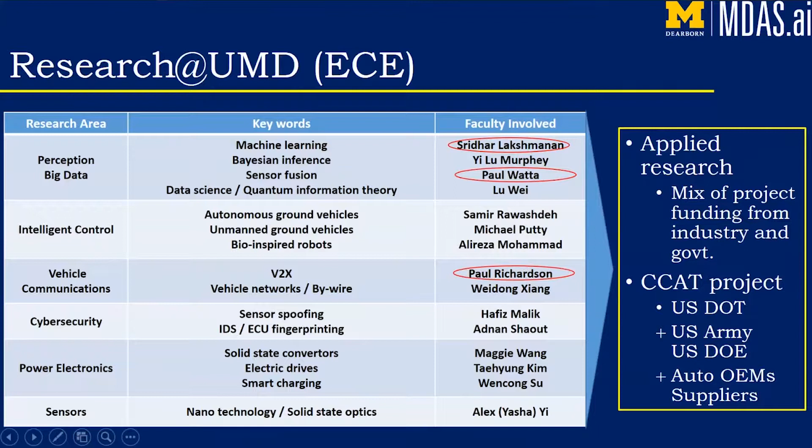I'm going to start this discussion on fuel-efficient platooning by showing a video. This is a video that was recorded late fall of 2018. I will pause this to make points, and then I will run this completely.

They all try to draft off each other by maintaining a closer than normal following distance. Following distance can be as close as 20 feet, as much as 300 feet, depending on different situations, and we'll get into it. In this particular case, around 100 feet when they're following each other.

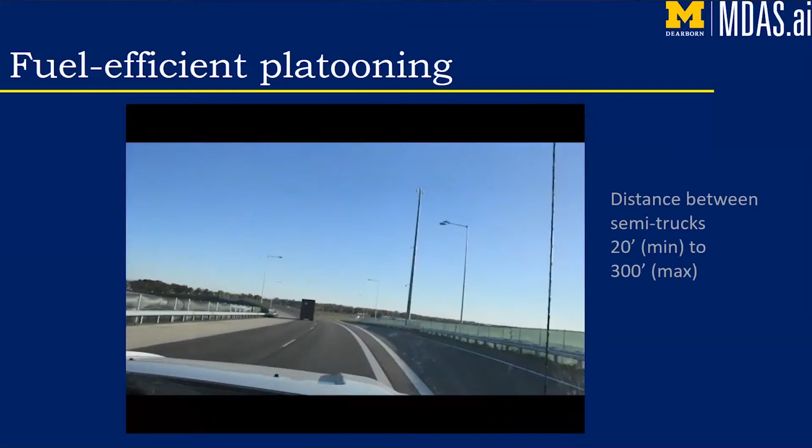This is a view of that platoon convoy from another vehicle, the vehicle from which this video is shot. It will make some maneuvers as it relates to this platoon, and the platoon will react to it, and you will see in a few minutes.

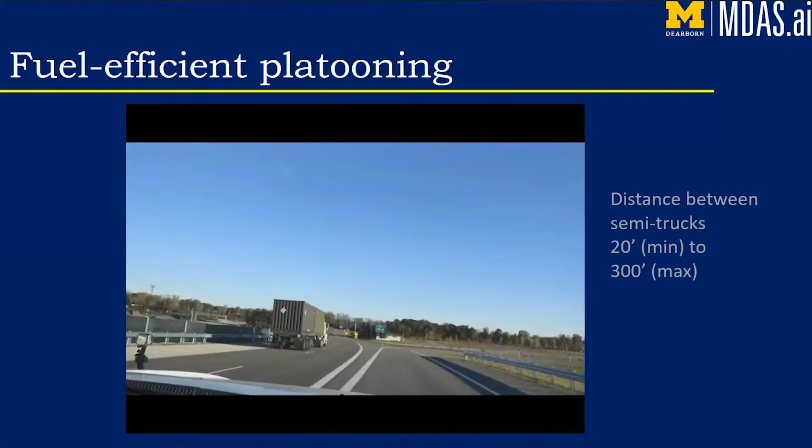This is a highway exit at American Center for Mobility, and we'll come around. What you saw there was that vehicle from which that video was shot trying to cut in between the platoon, between the lead vehicle and the second vehicle.

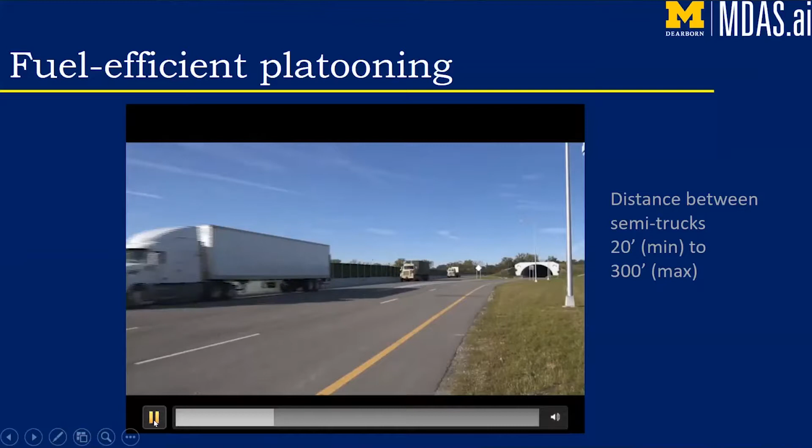When that happens, the follower vehicle increases the gap distance that this vehicle can safely operate within the platoon. When this vehicle leaves the platoon, it automatically closes the gap distance. You can see that when the other vehicle cut in, it increased gap distance with it as it would with the normal. Of course, those can be programmed in terms of what they are.

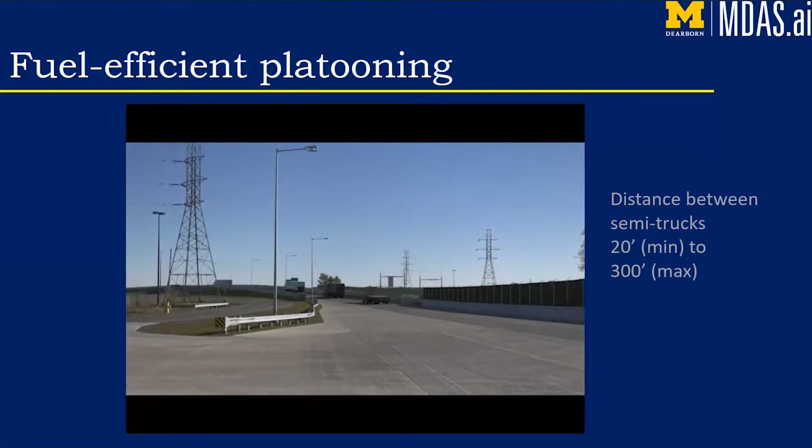As this video progresses, you will see various features in the road environment. You will see curvature, a little bit of vertical grade, some bridges, overpasses, etc. I will make a reference to them in the future. Every one of those presents a challenge from a radio network standpoint and from the standpoint of achieving this platooning feature.

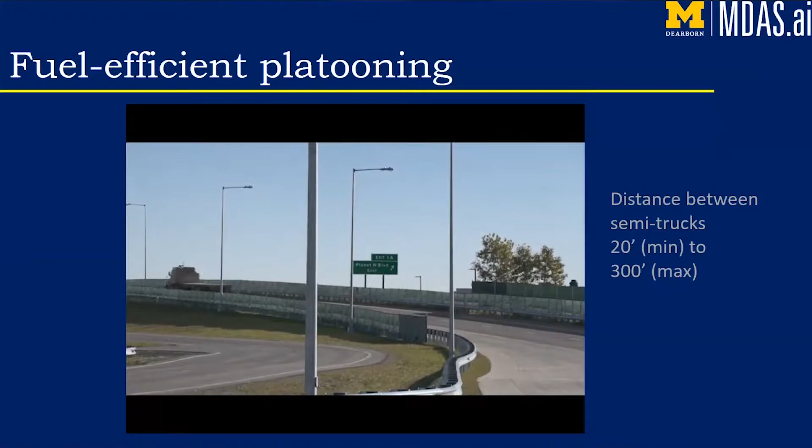This video was taken from one of the trucks itself, the follower truck. Again, on the left, you see this non-platoon vehicle, and you will see it make some maneuvers.

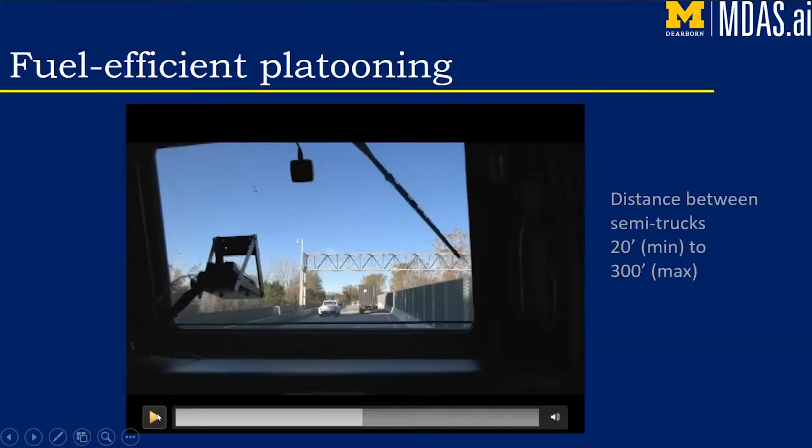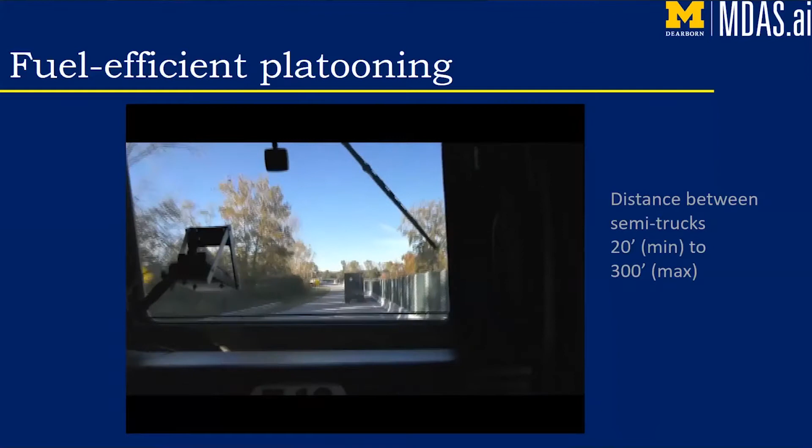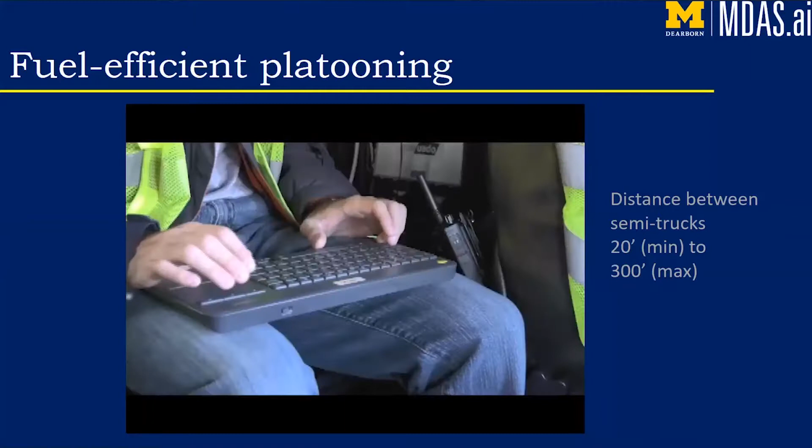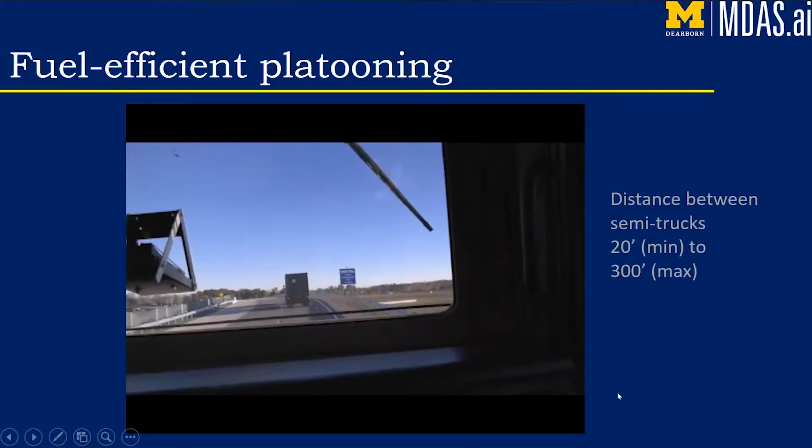So there's a dash display inside. You just saw the vehicle go through an underpass. This is the emergency stop. Another underpass. Another minute and we're done with this.

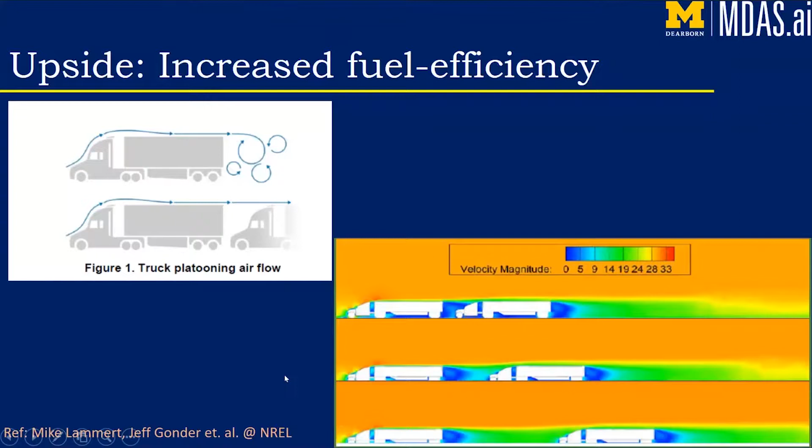So it is this ability to draft off the lead vehicle and not encounter the headwind velocity that is the compelling reason to do platooning. You will notice in many of my slides that I point out references. This particular reference comes from our collaborators at NREL.

What they have shown is surprisingly two things, or a secondary surprise: not only does the following vehicle enjoy a fuel efficiency benefit, but as a result of a high pressure stagnation region, this region also pushes the lead vehicle, so the lead vehicle enjoys some fuel economy as well, in addition to the following vehicle. The graph shows on the x-axis the vehicle separation distance and the fuel saving as a percentage of normal.

And let's look at the trailing trucks. Initially they actually become a little worse, but at around 10 meters, 12 meters, they peak and they taper off. So the further you go, the worse you get in terms of fuel savings.

The middle truck, so this is a 3-truck platoon, the middle one is this truck. From the get-go, you get fuel savings and it tapers off as you go. The tapering off can go anywhere from 18%, 17% at about 5 meters closing distance to about 5% at 90 meters closing distance.

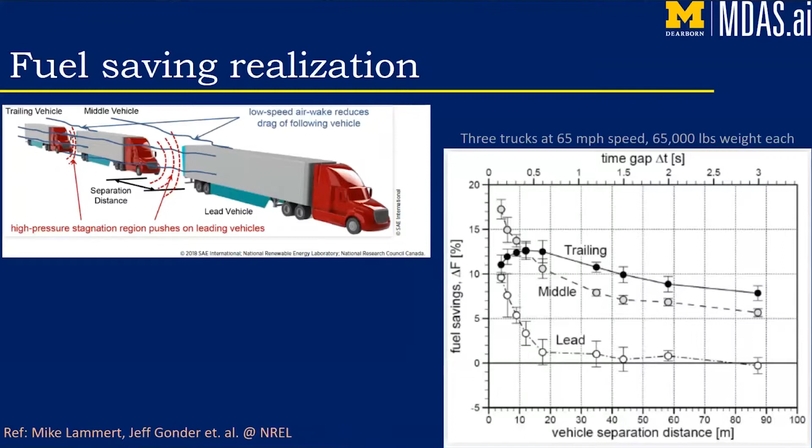If you look at the trucking industry as a whole, roughly about 22% of a typical fleet operator's operating cost is fuel. And if you look at society as a whole, Class 8 trucks are the biggest consumers of fuel. My point being, whether it be from the standpoint of a fleet operator or from the standpoint of society, there are lots of payoffs in looking at the fuel efficiency for semi-trucks, for Class 8 semi-trucks. For those of you interested in more of this, you can look at the references.

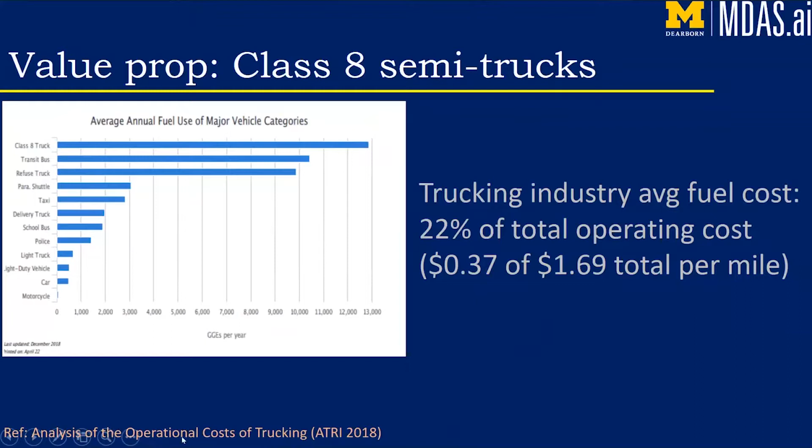The trucking industry also has a second problem. If you leave aside the fuel efficiency issue, they have a labor shortage issue. Just in terms of some statistics, 70% of the freight in the United States moves via trucks. You can look at the billions of tons in weight, the number of trucks deployed, or the number of truck drivers deployed. It's a huge industry, and roughly 40% of their operating cost is associated with the driver. For a variety of demographic and economic reasons, they've been experiencing driver shortages for several years now.

In the latest year available, 2018, compared to the year before, they were 20% short in terms of number of drivers, or 20% more in terms of shortage of drivers. And they expect that in 10 years this number will double. So even if you leave aside the fuel issue, reducing driver shortages is a compelling value proposition in that industry.

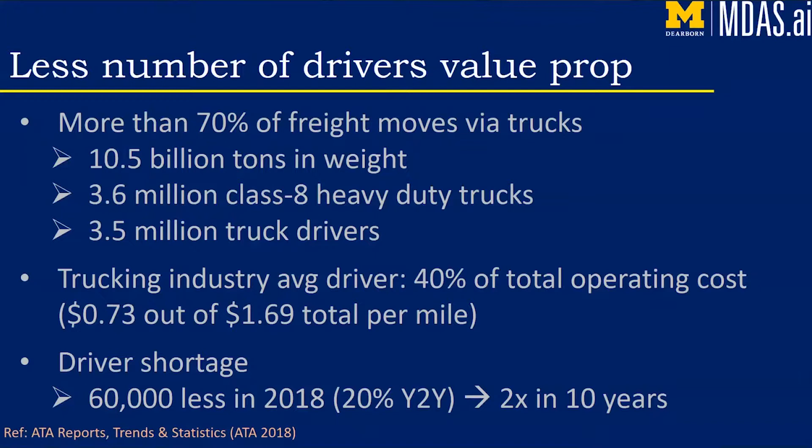In the semi-truck platooning problem, the normal gap distance for semi-trucks is about 1 truck length if you're traveling below 40 miles per hour, and 2 truck lengths if you're faster than that. In order to realize the fuel efficiency with platooning, you have to follow at very close gap distances, which can be less than 50% of normal gap distances.

There are other road factors in effect. You can have other vehicles cut in and out, resulting in sudden braking, acceleration, deceleration, as the case might be. You have vertical incline, which has to do with gears, and road curvature that cause vehicles to gradually decelerate.

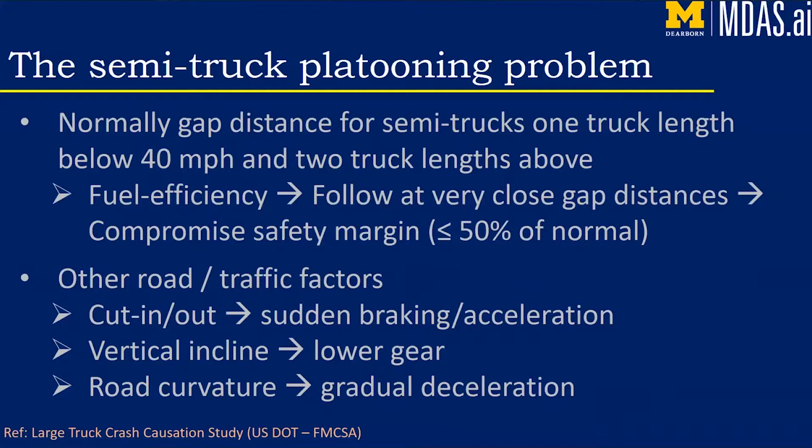So my point is that if you're going to imitate platooning as done by a human, then you have to deal with these types of issues, and that's the premise of the next third of my talk. I'm going to take a brief pause, and I'll take any questions you might have before I get to the second phase of my talk.

Yeah, it's Randy Johnson. Some guy called Brian. Hello? That's okay. No, he left me 2 voicemails. Please mute your phone if you're not the presenter.

Okay, so if there are no other questions, I will go to the second part of my talk. This has to do with how radio networks and vehicle-to-vehicle communications play a part in this fuel-efficient platooning.

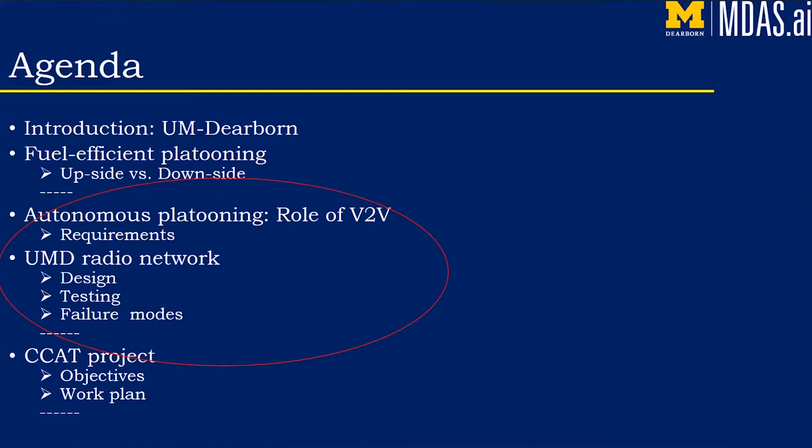Unlike a typical autonomous vehicle application, where you use perception sensors as your primary means of sensing the world, in this particular level 2 truck platooning that we've been able to achieve, we do it with no perception sensors. The lead vehicle has a very high accuracy GPS. In addition, it also has a V2V radio that allows it to communicate information to other trucks in the platoon.

Every vehicle in the platoon has a GPS and a V2V receiver. Every truck also has short range and long range radar, and the lead truck typically doesn't use it unless it's engaged in cruise control of some kind. But the follower trucks rely on that for their throttle control. So throttle control and braking is done with radar input as the driving force, and steering is done with GPS as the driving force. The V2V provides a sort of redundancy to both of them. So that's the role of V2V in all of this.

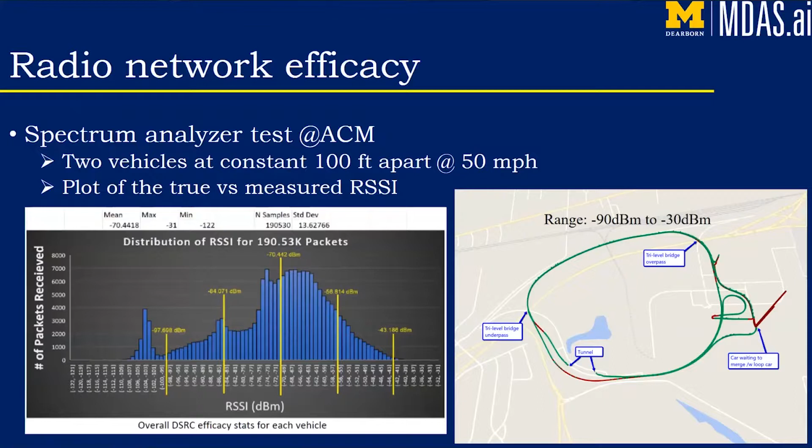You can see that the radio network performs quite well in terms of the RSSI. This histogram is over multiple days. The tests were carried out with different lengths between the trucks. You can see that despite all that variation, the mean is minus 70 dBm, which is very good, with a standard deviation of about 13.6 dBm, which is also very good.

Like I said before, the fact we have this embedded application means we can measure some KPIs very accurately, and the list of KPIs has grown a little bit. We don't have the new numbers for some of the newer KPIs. We are going to do some more additional measurements in our future data collection.

And I say expectation because the controller is still evolving, so what that expectation is could change in the future. But for now, this is the expectation of how this network will perform.

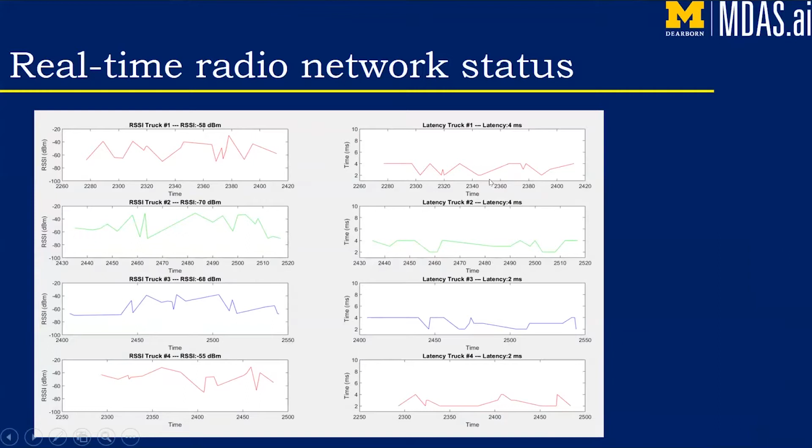Okay, so that completes the second portion of my talk. If you have any questions, I welcome them before I move on to the third portion.

Can you give us some idea of where the 20 hertz rate came from? And you said it varies. I'm just curious.

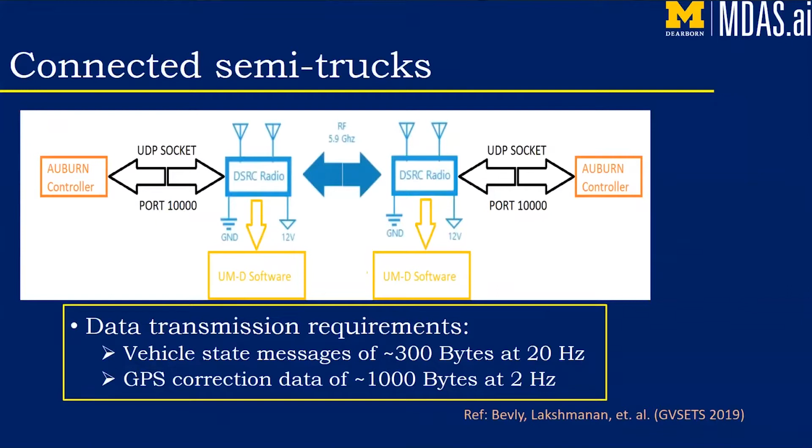The 20 hertz rate came from, let me go back a second. If you look at the controller for throttle and brake, it is an ACC controller. And if you look at the radar, that radar is operating at a 20 hertz rate. So the controller is optimized for that type of sampling time. So the radio network, since it's sort of like a, it matches that.

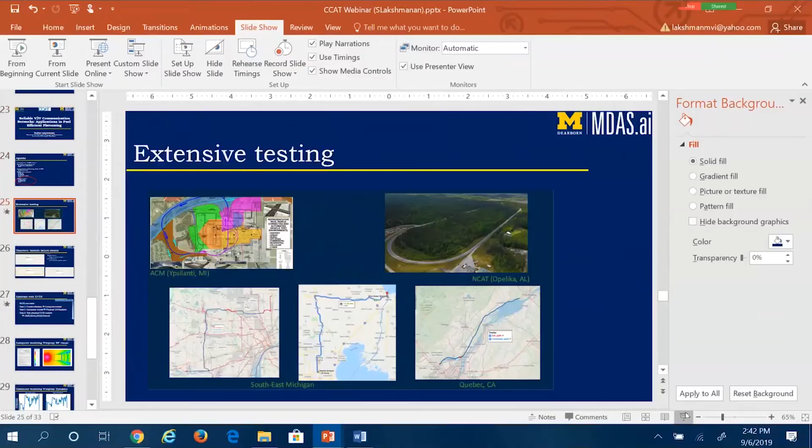The radio network that we previously tested extensively. We've tested it in ACM. We've tested it in Alabama at the National Center for Asphalt Testing, which is a 2-mile oval loop. This is the test facility. We've tested it on public roads in Southeast Michigan.

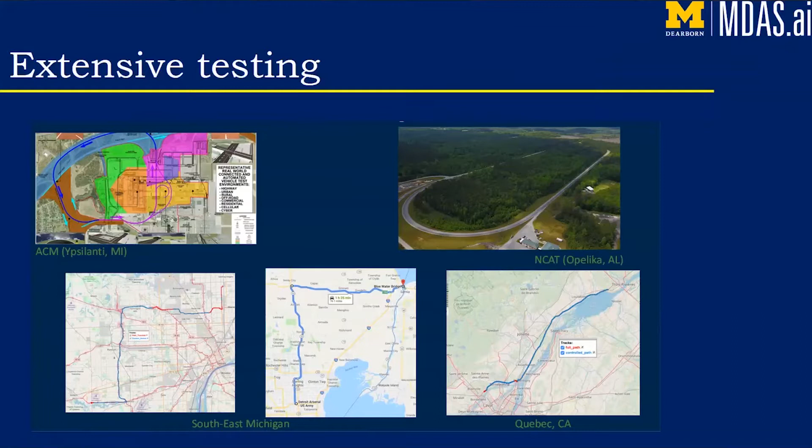We also tested it extensively in the province. And through this testing, we identified some failure modes for this radio network. It's not the case that it works all the time. Like any sensor, the radio network also has some specific failure modes.

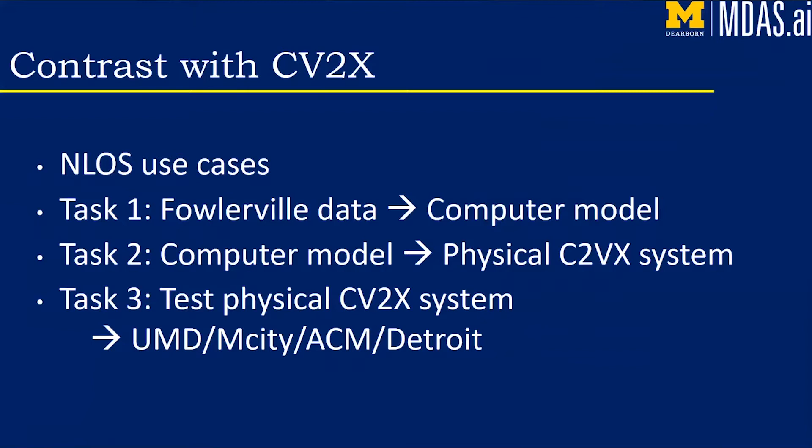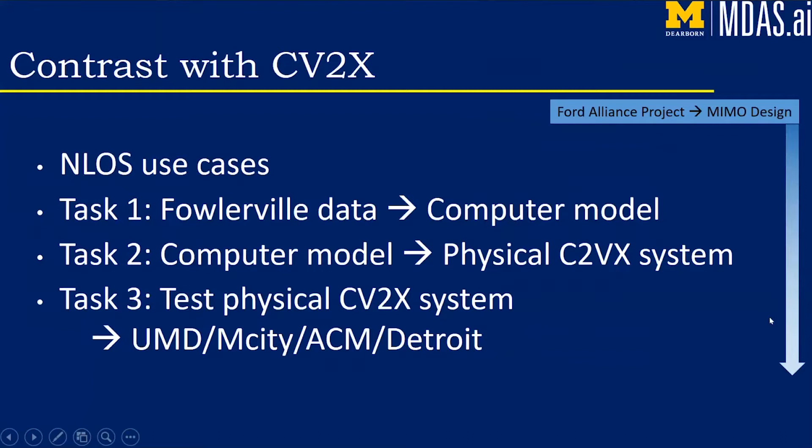We have a Ford Alliance project on MIMO antenna design where I'm not the PI, but a co-PI, with some overlap with these tasks I just described. In that project, the PI, and I'm a collaborator, is the one who's going to realize a multi-element antenna for a CV2X application.

As part of our CCAT project, in order for us to attack this computer model, we have been looking at software called Winprop and an associated antenna beam pattern software called FEKO, trying to understand how it behaves and how to use it effectively.

So I'm giving you a teaser of some of the types of things we do with it. Here is a transmitting antenna. We're trying to see what its radiation pattern would be when you have an occluding object that prevents it from having line-of-sight with its entire field of view, if you will. This is a visual radiation pattern of what happens in a situation like this.

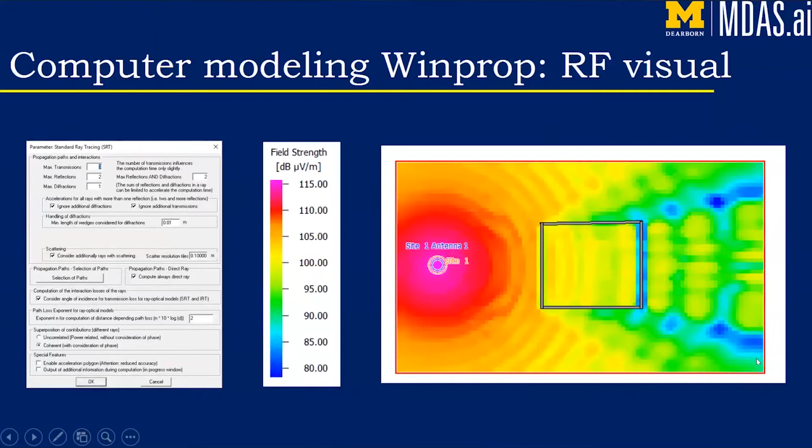It's sort of static, but we can also use Winprop to do dynamic simulations. For example, let's say you have a receiving antenna and the transmitting and receiving antennas moving together. That's a dynamic scenario, so the distance would go from 120 meters or so down to 0 meters as these two antennas come together.

With the Winprop model combined with FEKO, we can answer questions as to what the received signal strength would be with antenna diversity versus a single omnidirectional antenna. The answer is it's not the same, obviously, but we want to understand what the hits are. More importantly, where one should place what type of antenna, etc., is one of our objectives.

In using Winprop and FEKO, we understood some of its limitations. Although this is not part of the original proposal that we made to CCAT that was funded, we have a sort of side project where we are improving the RF rendering of radiation sources using some computer graphic techniques. We hope we can add to the available tools for the community and the V2V space when we finish this project.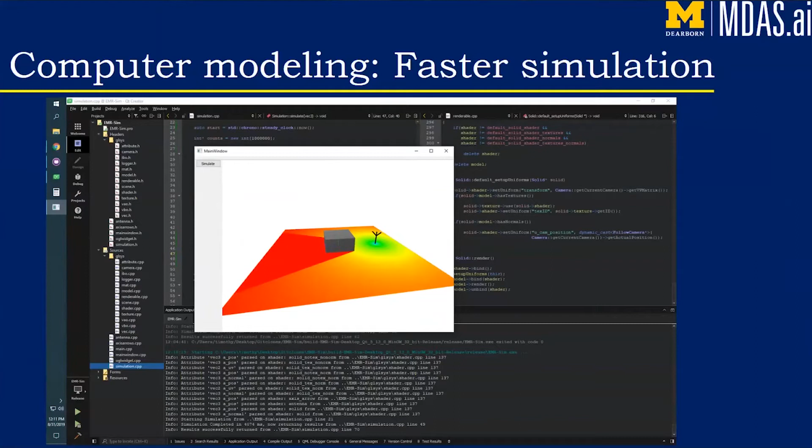Our immediate next step is simulation of the Fowlerville test track, which is the test track for which cellular V2X data is available. We are in the process of simulating this Fowlerville data, which involves getting the exact test environment in terms of material types and sizes, and the precise location of the transmitting antenna. The receiving antenna will go along this test track back and forth, and our goal is to correlate the model-based field strength with the actual field strength.

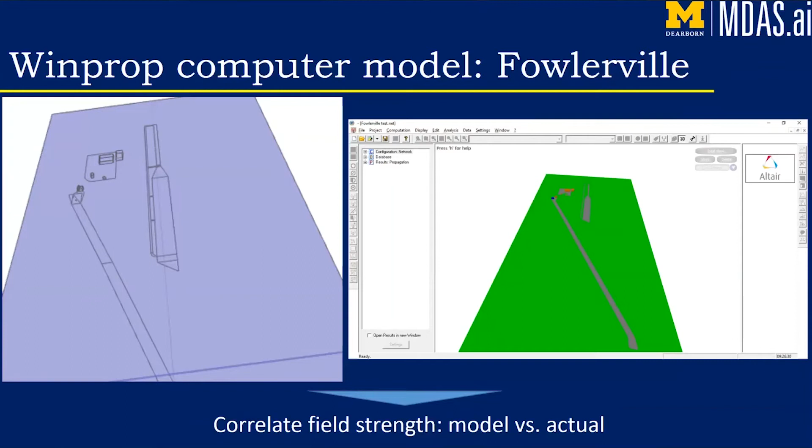We are about four months into the CCAT project, and we hope to have more interesting results, which we'll obviously make available to the community at large. I once again want to acknowledge all the people that made this work possible in terms of sponsorship, as well as technical collaboration, especially NREL and Auburn, our technical collaborators.

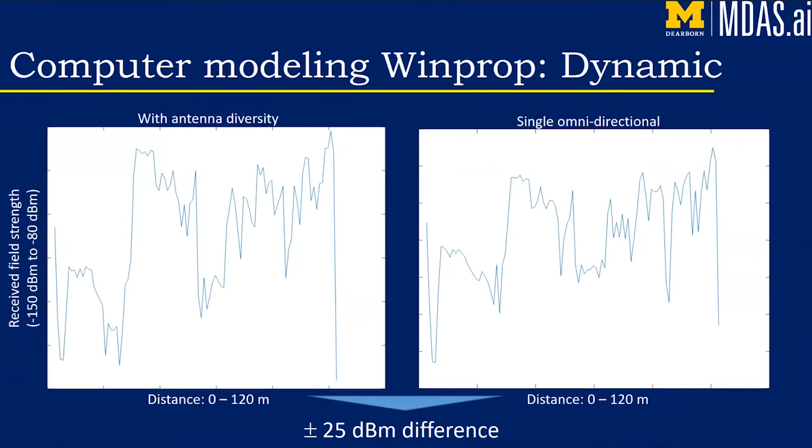That's the hope. Right now we're using DSRC, and DSRC has some known failure modes related to non-line-of-sight conditions. As we investigate C-V2X and understand it better, and optimize it, we want to be able to use it for this specific application. Yes, that's the goal.

So in the future, you want to utilize C-V2X into the truck. Yes, indeed. And you also mentioned the DSRC failure mode.

For these failure modes, does any of these involve—it's all non-line of sight, right? It's all some form of line of sight issue. In some shape or form, it is the fact that your RF propagation does not have a direct line of sight between receiver and transmitter.

If you do have line of sight, does the DSRC still have failures sometime? We haven't seen such failures. Almost all our failures are attributable to non-line of sight. Again, we haven't done any antagonistic testing, like RF interference or cyber interference. We haven't done testing like that, so I have to qualify it.

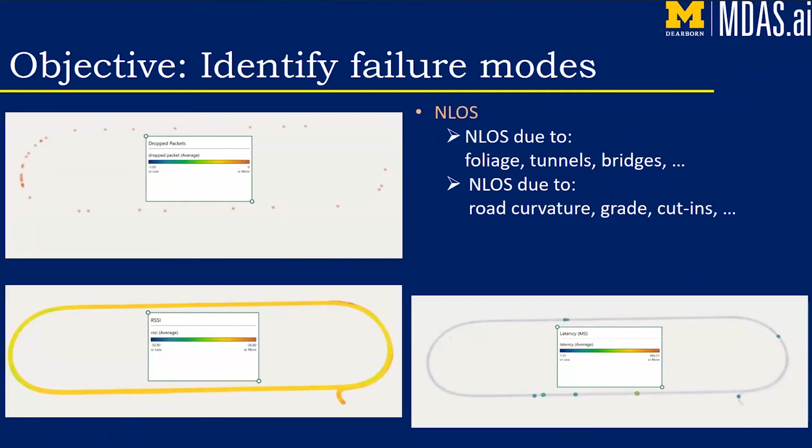No, in our experience—let me quickly determine what channel. 179 is, what rings a bell. Give me one second, let me tell you what we did our testing in. It's not coming up. Yeah, it's channel 179, unless I can find differently.

It's the channel that we use, and Qualcomm—I know channel 179 is a 20 megahertz channel. Are you sure you're using a 20 megahertz channel? Give me one second, I want to make sure I don't speak incorrectly. 178. 178.

Okay, I don't care whether you're using DSRC or CV2X. It's the channel utilization—if you're surrounded by a whole group of other participating non-commercial vehicles, what the impact would be.

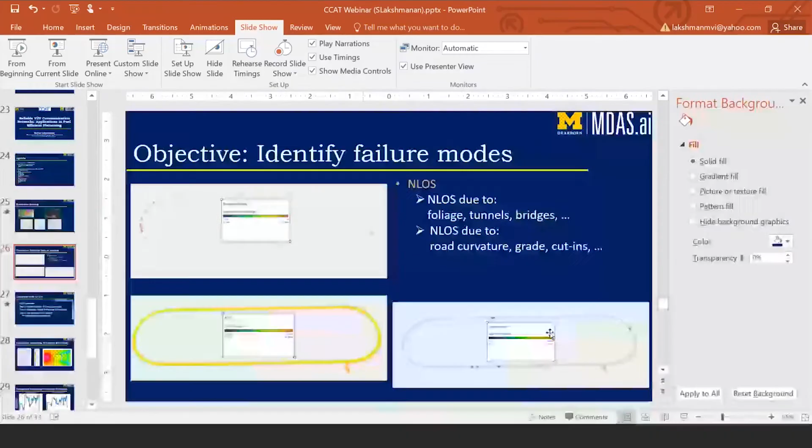Right, so scalability is certainly in the future, but the failure modes that we encounter, despite the fact that the channel utilization is very, very small, less than 10%.

This is Jim from Qualcomm with a question, if I may. Sure, if you've answered Bob's question to his satisfaction.

We haven't planned that far ahead yet because we don't have any cellular V2X radios that we are immediately planning testing with just yet. But thank you for sensitizing me. I will pass it on to the team and make sure that they are aware.

There are two sets of data. I guess you have a semi-empirical RSSI model, or whatever you did for propagation. You didn't explain that, but we look forward to that. But whatever it is, you've got to see whether you use the 20 megahertz latest report or some of the early reports which had 10 megahertz. Noted.

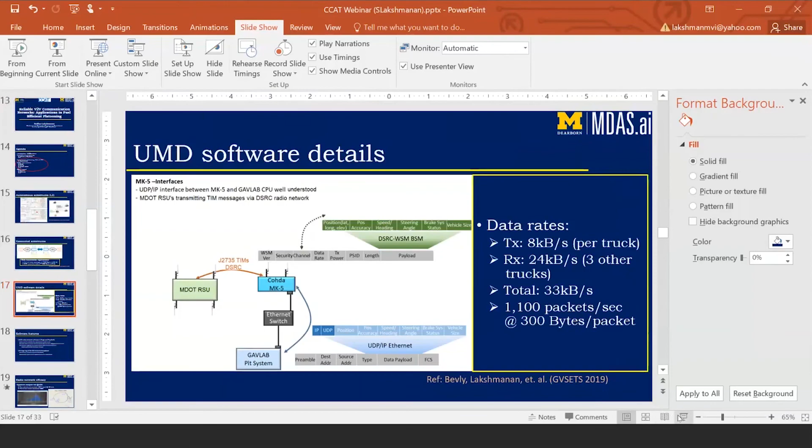Primarily, since you have a DSRC network for platooning, we want to be able to leverage that same network to communicate with roadside units and have information about, basically, the TIMs that are broadcast from the RSUs. You wanted to be able to share it within the network. But it's been our experience, at least in testing within Michigan where these RSUs are physically installed, that it's a little bit of growing pains for us to communicate with them, because many times they're not turned on. Or if there are some slight issues—at least in the times that we've tested in Southeast Michigan—maybe it'll be different this fall when we test.

But to answer your question, our hope was that since you have a radio network, can you piggyback on that network to obtain information from the roadside units that can be shared within the network. Okay.